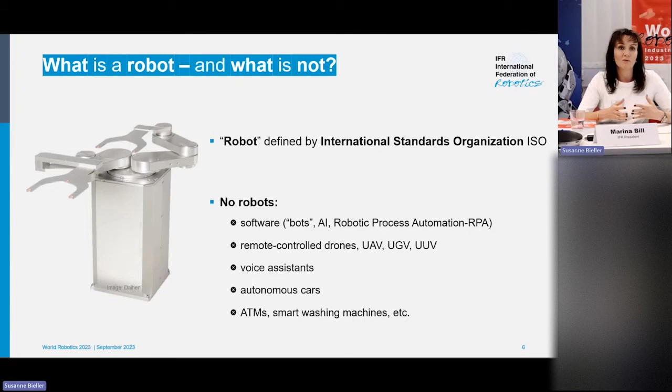If we look at the 2 types of robots to make it all a bit clearer, we normally talk about industrial robots and service robots. To make it easy: industrial robots produce something, service robots don't produce something but offer services. That's the easiest way of explaining the difference between the two.

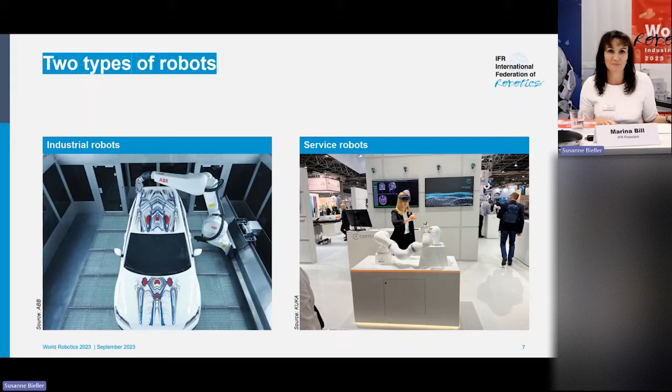After that small introduction, let us directly dig into the figures, which we will present here. We also have it all in book form here, so for all of you interested in more details, you can get access to this book at any time.

So we have another very exciting year to look back to, 2022. The highlight of this year is that, again, it was a year with over 500,000 installations, the 2nd year in a row. So we're now looking at about 553,000 new units being installed globally, a growth of 5%.

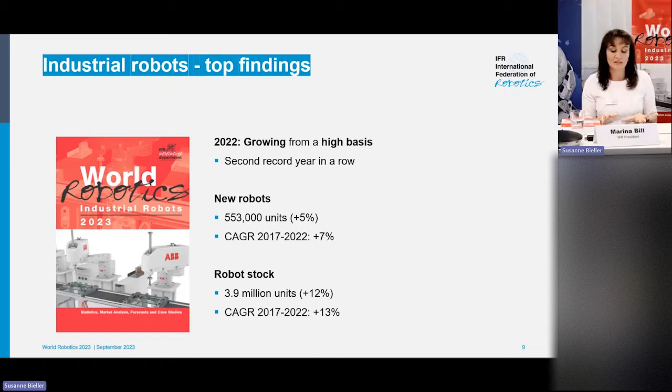That means we can look back to a CAGR over 5 years of 7%, and the installed stock has gone up another 12%, almost reaching 4 million. We will focus this presentation a lot on what happened in 2022, but we will also take the opportunity to reflect a bit on the last years.

Let's look at the last decade of annual robot installations and the amazing development this has had. Since 2012, it has been a strong growth. If you look at the 2 COVID years, it flattened out a bit, but that was completely recovered in 2021. We see this growth continue in 2022 with a strong growth of 5% from a very high level - a CAGR of 7%, and the market continues to grow rapidly.

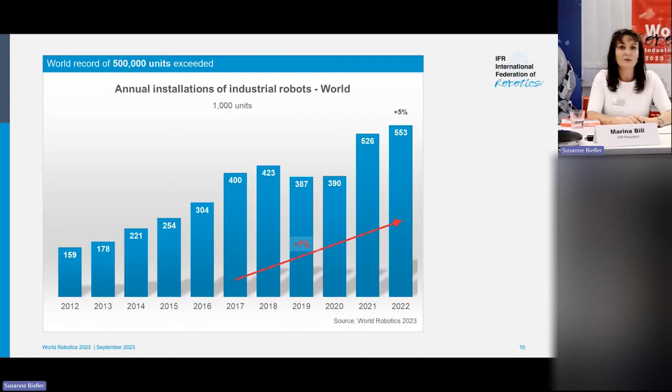That, of course, has an impact on the robot stock, which has been growing 13% since 2017. So we are up to almost 4 million robots installed somewhere out in the world.

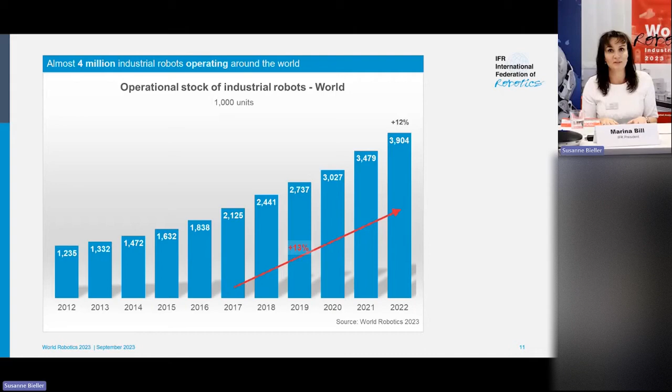Looking at where robots are actually being used by industry type, for the 2nd year in a row the electrical and electronics industry is the largest for units installed, and second is automotive. Both these large segments had double-digit growth - electronics with 10% growth, and automotive with the strongest growth at 16%.

For those of you who looked at last year's figures, you could see there was also big growth in all other sectors - metal and machinery, plastic and chemicals, and food.

Those sectors for this year had a little bit of a stabilizing backwards, but compared to the very high level and the very strong growth achieved the year before, this is a little bit more of a mixed picture, with electronics and automotive having double-digit growth and the other ones being flat or having a little bit of negative growth this year.

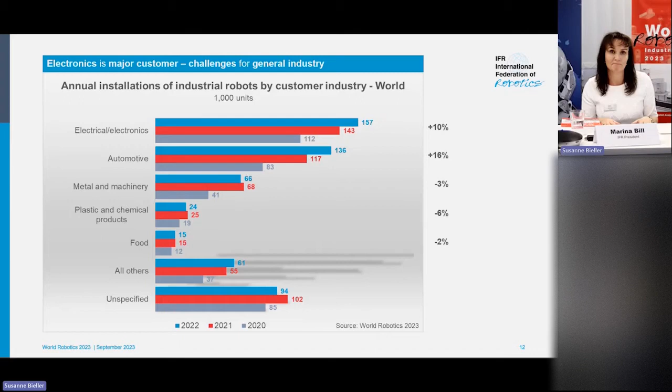To particularly highlight the industry sector, this is where we see a lot of new types of companies entering the market, and with that also a lot of new types of applications and new segments starting their automation journey. One of the key drivers, especially from the industry segment, is the rise of cobots. So let's look a little bit at the cobot development.

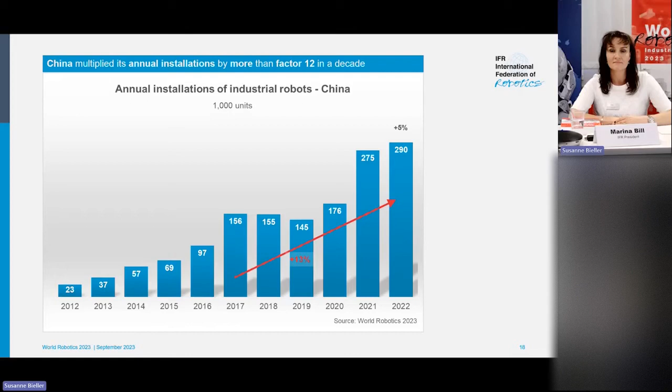I will stay in China for the next two slides. First of all, note that over a decade, annual installations there multiplied by a factor of 12. This is really something remarkable — I've not seen this before anywhere.

The compound annual growth rate since 2017 was +13%. You can also see that over the COVID period, there was not a real slump in the data — on the contrary, annual installations continued to grow. There was a big jump between 2020 and 2021 of 57%, and on top of this, 2022 grew about 5%.

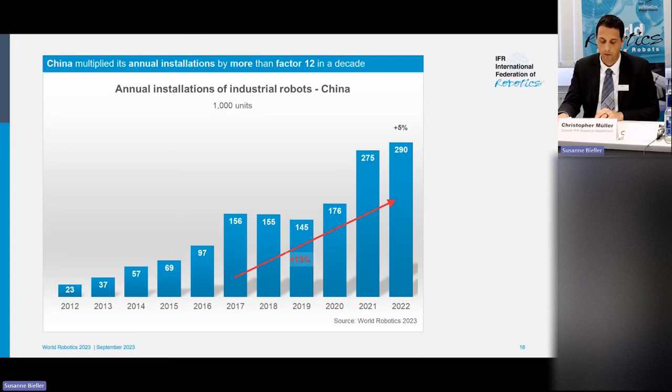If we look a little deeper into the industries, we can see the top three in China are electronics, automotive, and metal and machinery. Of those, metal and machinery had a decline. We had 26% growth of installations in automotive and 7% in electronics.

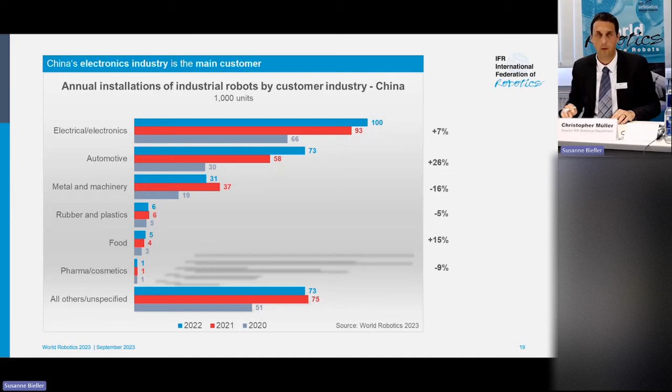You might also notice that we've reached 100,000 units installed in just China's electronics sector. It's also maybe a noteworthy detail that 60% of all global installations in electronics took place in China, and 54% of global robot installations in automotive took place in China.

From this, I would like to switch over to Japan. For Japan, we see a strong recovery after the COVID slump, and we record the second highest installation level ever. We had plus 9% in 2022, to around 50,000 units, exactly 50,400. Second highest, because in 2019 it also rounds to 50,000, but it was only 49,900.

If we go a little bit deeper into the customer industries, you can see the same ranking as in China. We have electrical electronics first, growing plus 13%, then automotive plus 3%, and metal and machinery plus 20%.

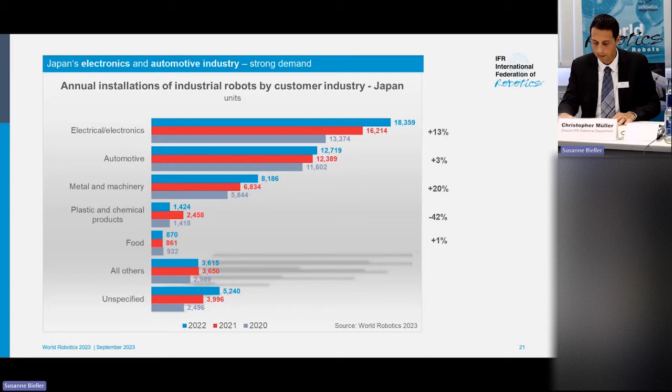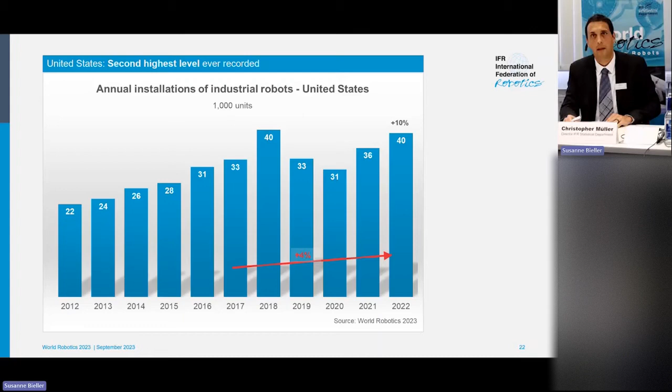If we have a closer look at industries, we can see that automotive was the growth driver with a very strong plus 47% of installations, more than 14,000 units being installed in the United States in the automotive industry in 2022. And this is remarkable because in previous years, we saw a tendency and a shift towards the general industry. What we can see in 2022 is that the general industry in the United States rather cooled down their demand a little bit, with different numbers, of course.

As you can see, for electronics, we still have growth plus 26%, but it is relatively a smaller market than we had it in China and Japan. We had metal and machinery with a slight decline, and also plastics came with double-digit decline. But this is, as you can see on the slide, if compared over the past few years, nothing unusual. We have rather small numbers, so rather small changes in unit count already create large percentage rates.

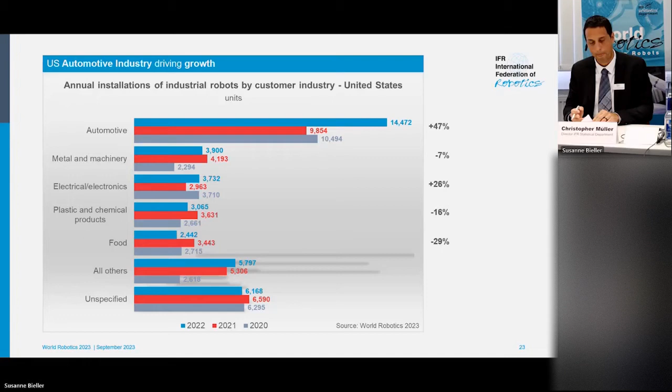If we move to Korea, the picture that we observed over the past few years remains. The compound annual growth rate since 2017 is minus 4%. In 2022, we again see something around 32,000 units, which means we had a sideways movement roughly since 2019.

If we go deeper into the industries, you will notice that the semiconductors part of electronics had a strong decline by almost 32%, and all other electronics segments had a strong plus 39%, at minus 5% in automotive. And these segments conduct the main customers in Korea. Overall, electronics was up 3%, which combines these two segments before.

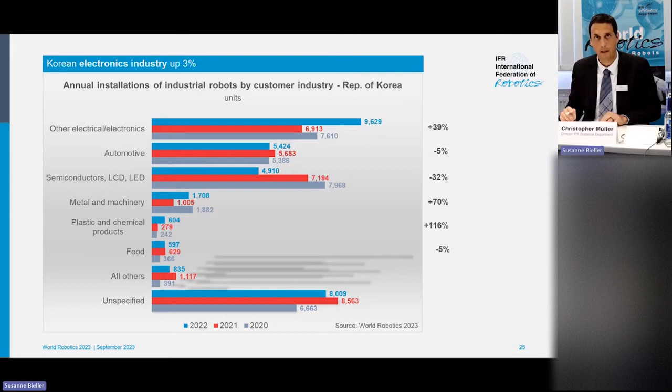Moving to Germany as largest European market and final market in the top 5. We observe a minor decline. It rounds to -1%. As you can see in the figure, it is not even 300 units different from 2021. So we could also call it a sideways movement.

What we've seen after the COVID pandemic is a strong growth of demand, which can be traced especially to a segment that we call low-cost robotics. It is addressing new customers in the general industry and outside of manufacturing that started using robots, using the COVID pandemic and all the restrictions as a starting point to have a deeper look into robots.

What we can also see is that automotive in Germany declined strongly by 27%, while the metal and machinery industry grew strongly by 19%. And the picture of declining automotive, that is something that we witness across Europe in several industries. It just reflects the weakness of the European automotive industry that we also see, for instance, in labor market data across several countries.

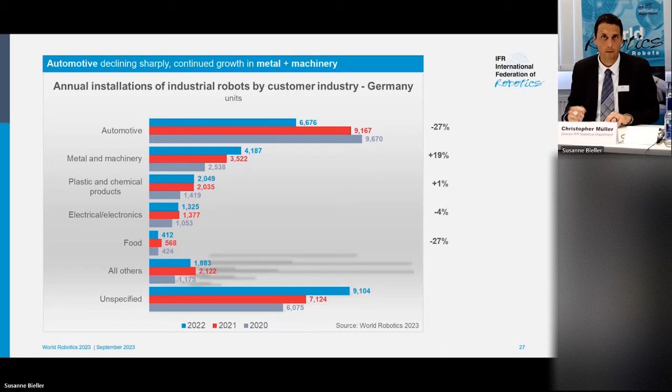So far the look into the past up to 2022. Now I would like to spend a few moments on our expectations for the ongoing year and the coming years until 2026, which is our forecast period.

We had plus 5% on the global scale, as Marina said, in 2022, and we expect a slight acceleration, plus 7% in 2023. There is a lot of backlog in many countries of the world because we had some issues in the past in the industry, and many projects in other industries are postponed or a little bit delayed, and this will drive 2023 numbers. For the following years, we expect on average plus 7% of growth each year.

I would also like to take the opportunity to dive a little bit deeper into the different regions. Again, the blue bars illustrate Asia, and we expect plus 7% in 2023 and also plus 7% on average for the following years.

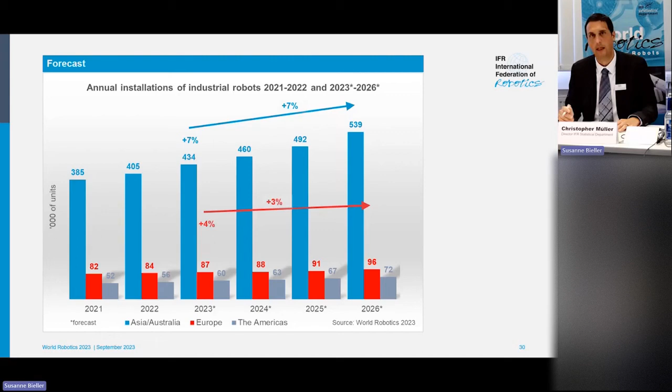The main market here is, well, China's economy is usually said to cool down, but if we have an objective look at the numbers, for instance, the OECD, we still see a +5% growth of GDP being forecasted this year and the following year. And also China's 5-year plan intends to create more resilience through domestic supply chains, which means we have increasing investments also in robotics.

And in Japan, we have a similar program that is supposed to support the domestic market, and we have also many investments in automotive already being announced. We expect 2023 to be rather flat, but we expect acceleration from 2024.

In Europe, which is the second largest market, we think that 2023 will be strong because we have a lot of catch-up effects from backlog, and at the same time we observe, for instance, in our IFR quarterly survey, declining order intake. So we expect 2024 to be a rather flat development, but then we expect continued growth on a rather small scale, plus 4% is our expectation for 2023 for all over Europe, and plus 3% on average each year for the next few years.

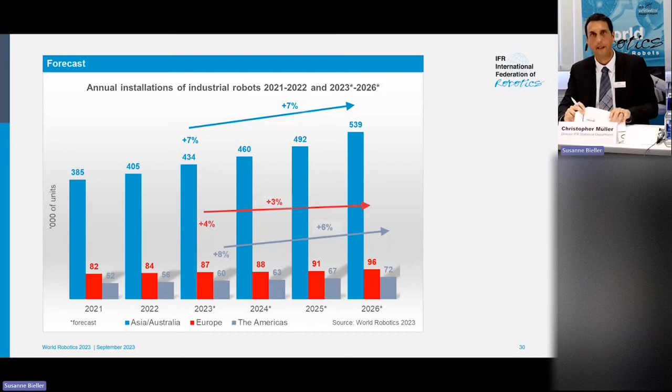I already mentioned that supply chain constraints were an issue, and they still are, but they are definitely easing compared to the previous year. And still, we are talking about inflation as an issue, inflation remains higher than we used to enjoy in the past decade. But we also see a positive development here in coming back to a normal level of inflation.

It is important to note that the slowdown of the global economic growth will probably not have a direct relation to robot installations. Of course, a lot of the overall forecast depends on China as the most important market, so the performance of the Chinese market has a strong impact on the overall results. I already noted that we had a lot of order backlog from 2022 that drives turnover and installations in 2023, while we also observed declining order intake in the ongoing year. So this is why we expect the following year to have a rather flat development.

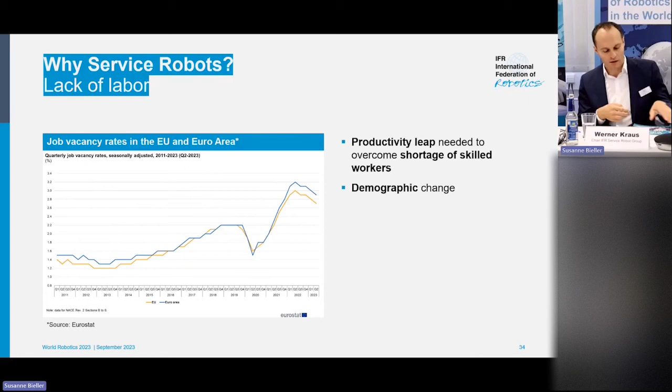And that's also the reason why we've compiled this report with over 400 pages, which goes into a lot of application domains where service robots are already deployed or are shortly before really scaling up into the industries, especially in the area of professional service robotics.

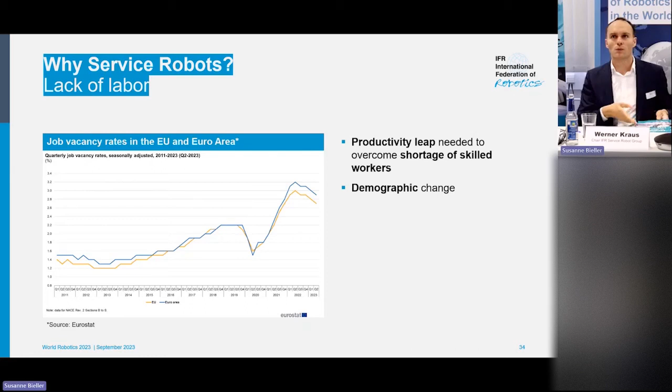When we are looking into our market figures, we've also measured a continuous growth of the service robotics market. In the area of new professional service robots, 158,000 robots were deployed last year. This is a growth of 48%, also a tremendous growth.

Looking into the consumer service robot market, especially vacuum cleaners and mowing robots, we have 5 million robots worldwide, which is shrinking by 12%, probably because people go out again. And today it's more the labor market which is driving the service robotics market on top.

Looking in detail into the top 5 application areas for professional service robots, the largest market by figures is transportation and logistics. These are all autonomous mobile robots deployed in warehouses or in production, but also the robots which we more and more see in restaurants for clearing tasks, for example, or doing transportation tasks in hospitals.

Next comes the medical and healthcare market, which is almost constant with 9.3 thousand robots. These are surgery robots or robots for rehabilitation. So the market is, from the figures, smaller than transportation, but the robots are really expensive.

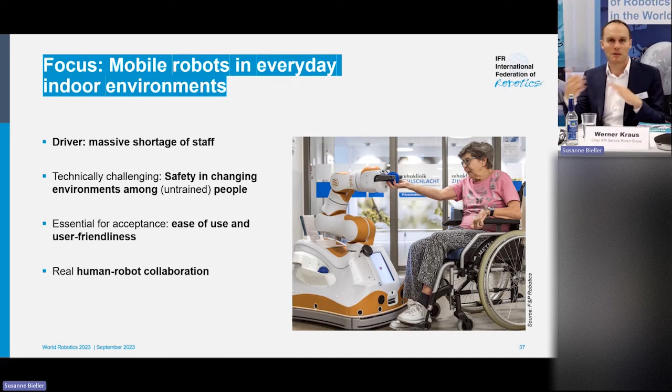And on the other side, we also have a real human-robot collaboration, with the guests but also with the staff. The same applies in the area of floor cleaning robots, which are used in supermarkets, airports, train stations, where we also have a shortage of staff.

And here we also have collaboration between humans and robots, in the sense that the robot is cleaning the big areas and the human in parallel is taking care of the edges and the special cleaning tasks. We also see an increasing level of autonomy. For example, the robot can automatically change the water and dispose of the wastewater. Also here, the market is strongly driven by the Asia-Pacific region.

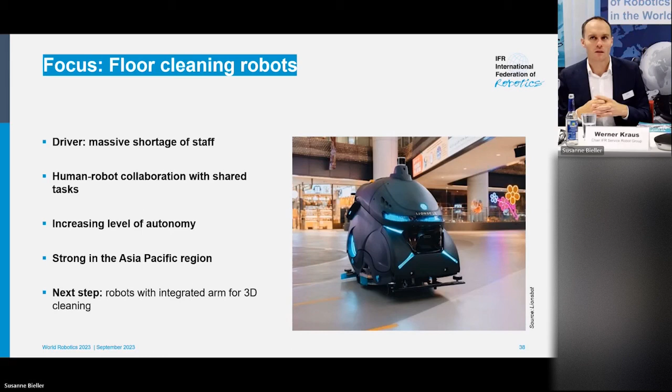And as a next step, we also see that the robots are further developed, that they also receive an arm, so they are not only limited to cleaning the floor but can also clean a table, for example, making 3D cleaning. Then the next focus area where we interviewed companies was the area of agriculture.

Here it's of course also the shortage of workers. On the other hand, also the environmental issues. We have strategies towards ecological agriculture. The good message here is that the safety issues are overcome today, as it's no longer a market entrance barrier. So it's relatively easy. Safety systems, for example, with a cable around the robot, which detects a collision. It's a simple solution, but efficient.

And the point here is that the robots are used to take preventive actions instead of cure in crop protection. And we have, of course, always a robot together with robotic processes, for example, for weeding. And the challenge here is full autonomy in locomotion, so that the robot can really work without a human supervising it.

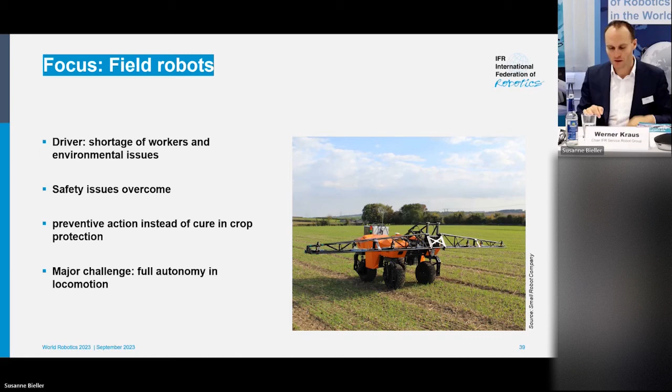So this robot market, more than 100 pages, is driven by almost 1,000 companies, service robot suppliers worldwide. And here we also have a continuation of the trend we observed last year, that we had really baby boomer years between 2013 and 2016, where up to almost 80 new companies were founded every year. And these are no longer startups, because they are older than 5 years. They are consolidated. They have made their way in the market. And today, around 9% of these almost 1,000 companies are younger than 5 years. This means we have 9% startups.

We see that there are, of course, lots of startups in robotics, also service robotics. But this data is focusing on the robot producers. And lots of innovation is done on top of these robots, for example, in the area of fleet management. For a couple of years, we have had, for example, standardized interfaces to autonomous mobile robots, VDA 5050, which is pushed forward by the automotive industry. And there are now also robotic startups that do not produce their own robots, but do fleet management, for example. And that's one kind of innovation area.

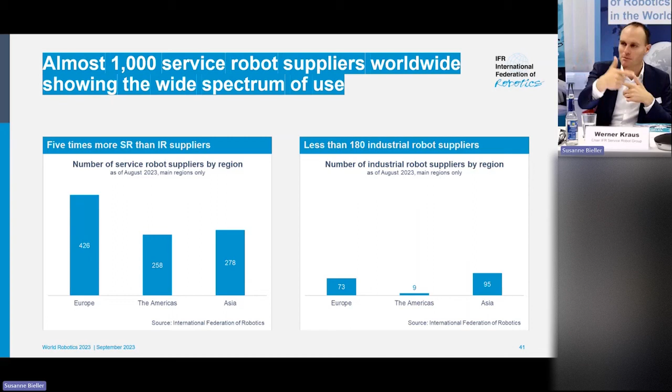And on the other hand, we also see a consolidation towards standardized hardware, which is also part of the explanation for this figure. Looking one level higher, comparing industrial robotics with service robotics, we see that we have 5 times more service robot suppliers than industrial robot suppliers. So worldwide, we have almost 180 industrial robotics suppliers and almost 1,000 service robot suppliers. The reason is, of course, that a service robot is always a product for a specific application. It's for cleaning, transportation, surgery. And therefore, we have a much more diverse market, and therefore also 5 times more service robot suppliers worldwide.

Yeah, we can go on looking into the research trends. So around 50, 60 years ago, we started with industrial robotics. Then it went to autonomous mobile robots. From there, now we have the leap toward AI-enhanced robots. It goes towards cobots. And when we look today into the press and press releases about what's going on in the market, we have a tremendous trend toward humanoid robots. There are lots of activities, also venture capital is put into this market. And so the trend goes in this direction.

But we see these robots as prototypes. They are not available in our market figures. And the same applies also for the legged robots with arms. So they are already in the market and used for applications in security, for example. But we see we are really on track, and more applications are now really scaling up in exponential growth.

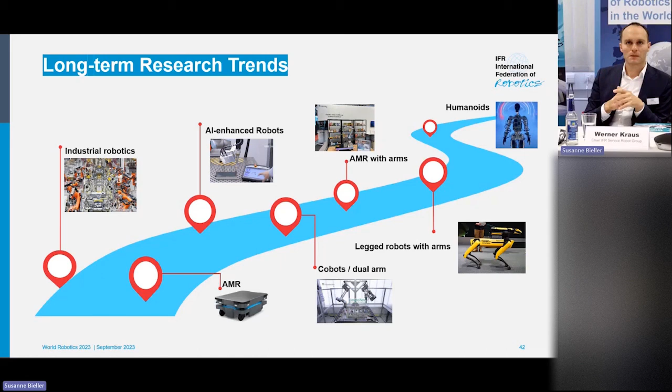Looking into the future, from our outlook perspective, we have a tremendous market pull from external challenges. We have high-tech robots actually, but when deploying them into the application environment, we have challenges like doors, for example, or that the robot can change floors. This means it has to communicate with elevators. Here we also have new software solutions like the Open Robotics Middleware Framework, Open-RMF, which allows a robot to communicate with an elevator, which lowers these challenges.

The good message is that service robots are collaborating with humans, so they are increasing productivity, but we never have the scenario of lights-out areas. There's always a human, which is supported by the robot. And then it's more a software business, like fleet management.

And we see that humanoid robots are still in the early days, but it's really clear that the market goes in this direction. But there are still lots of questions with humanoids, like grasping, scene understanding, safety. Also, is there a business case behind it, because such a robot is quite expensive. Therefore, there are a couple of questions which are not yet solved, compared to an easier case, for example, a cobot case. Yes, and with this, I want to end the service robotics report.